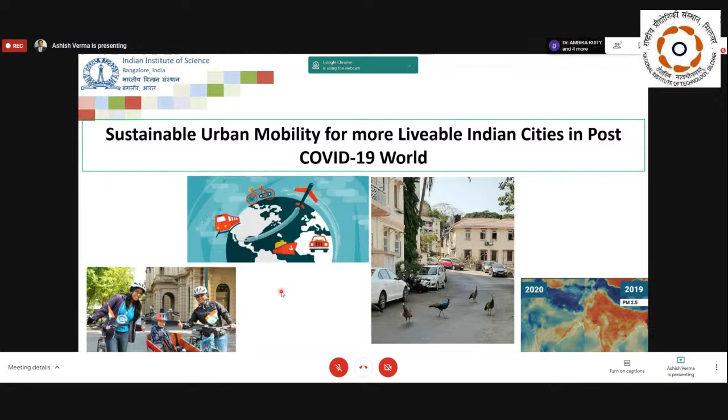But when we look at what a post-COVID world would be in terms of the transport system, it's important to also take a recap of what the pre-COVID-19 world was and what situation we were facing, because most of the time our memory is short and we tend to forget what we were experiencing. One can throw statistics, but it's very clear that we have seen steady growth in traffic congestion, growth in accidents and fatalities due to road accidents. We have also been seeing growing environmental problems, whether in terms of degrading air quality, increased noise pollution, or climate change impact.

With more and more vehicle kilometers traveled by motorized modes and road infrastructure being pumped in, we have also seen growing fuel consumption, leading to higher exhaust emissions, causing negative health impacts. The sum effect of this we have seen in terms of degrading livability of cities. These are all glimpses that have been quite common in the pre-COVID-19 world.

We have to keep this picture in mind, what we were experiencing in the pre-COVID world, when we go towards the post-COVID world. As I said, the lockdown has shown us how nature was thriving and reclaiming its space, and we have seen these visuals and news about it.

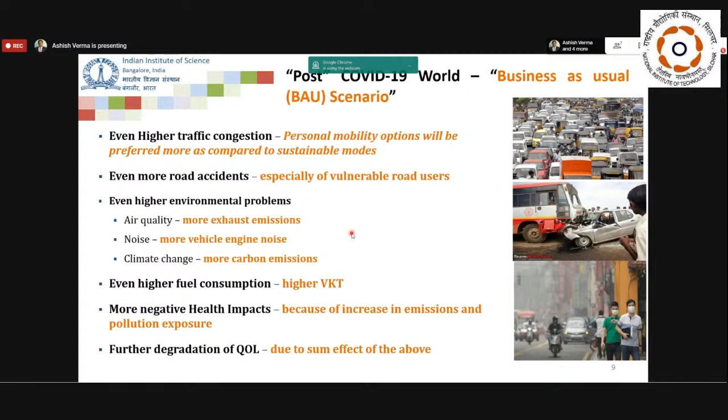This would anyway lead to further degradation of quality of life if we just go into the post-COVID-19 world with a business as usual mentality, due to the sum effect of all these things.

Now, we have understood over time that the transportation discipline has shifted from a supply-centric, traditional engineering-focused set of interventions to more demand-oriented, demand management-based interventions.

We have clearly understood that the traditional approach of transportation planning, which was always focused on V by C ratio, is no longer resulting in a sustainable transport system.

So transportation planning should no more be just about removing congestion points, taking this bottom-up approach and reducing V by C ratio, but should also be about reducing the total vehicle kilometers traveled by all motorized modes and thereby reduce the dependence on fossil fuel.

So it basically calls for a fine combination of both bottom-up and top-down approaches as the best way to move forward in terms of transportation planning, which would then lead to a sustainable transport system.

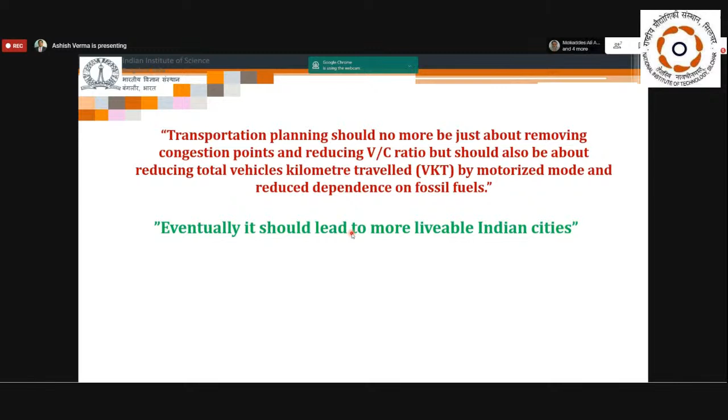Eventually, these interventions should lead to more livable Indian cities. Any intervention that degrades the livability of cities - there's no point in doing such interventions. So one has to be very clear and understand the causality between transport interventions and the impact on livability and quality of life, so that our interventions don't lead to degradation of these important aspects.

Now, achieving this was comparatively easier in a pre-COVID-19 world, but would be more difficult and challenging in the post-COVID-19 world, and of course it would be impossible under the business as usual scenario that we talked about.

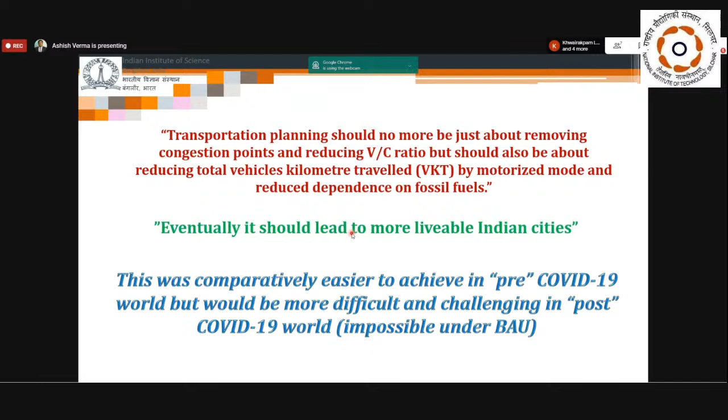These bundles should be a good combination of planning, regulatory, and economic instruments. So we're talking about not just planning interventions like increasing network coverage of public transport, or walking and cycling infrastructure, or mixed land use measures, but also defining car restricted roads, congestion pricing, park and ride, carpooling and high occupancy lanes, and electrification of buses and cars. A fine combination of these interventions is the best way to achieve the best possible scenario of urban mobility.

Now, to sum up what we understand from the sustainable urban mobility scenario, I would try to highlight the core principles that we should think about and follow. The rest of my presentation would try to give a flavor of how these core principles can be the focus of transport planning and can be achieved. I'm laying down these 9 core principles. First is reduce the need to travel.

I think this is very well understood during this pandemic time. The fact that this whole webinar is being arranged online clearly shows the amount of travel all of us could reduce—experts traveling, attendees traveling and meeting at one place, and so on. Likewise, in normal urban commuting situations, a lot of trips can be reduced by reducing the need to travel itself.

We've seen how work from home has proved effective—working from home on some days, staggered and flexible work hours, studying from home, online shopping and home delivery and things like that. These are some measures that we've learned can be effective in creating a more sustainable situation. Second is reducing the distances for travel.

In an urban context, it's about mixed land use policy and planning. The whole vision of vocal for local that our Honorable Prime Minister gave—if we think of it in terms of these transport interventions, it's about why there is a need for people to travel the length and breadth of a city for daily commuting and daily needs. Why can't it be self-sufficient within a given locality and neighborhood, at close distances, so that when the place where you live and the place where you work or study are closer, it's easier to adopt sustainable modes of travel.

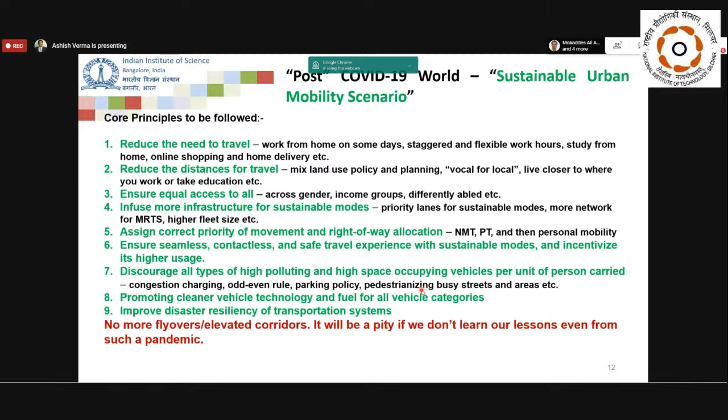Cycling, of course, fits very well under this COVID scenario. It takes care of both social distancing and sustainable mobility, and can be easily affordable to all sections of society. It's not a costly mode that a large section of society cannot afford.

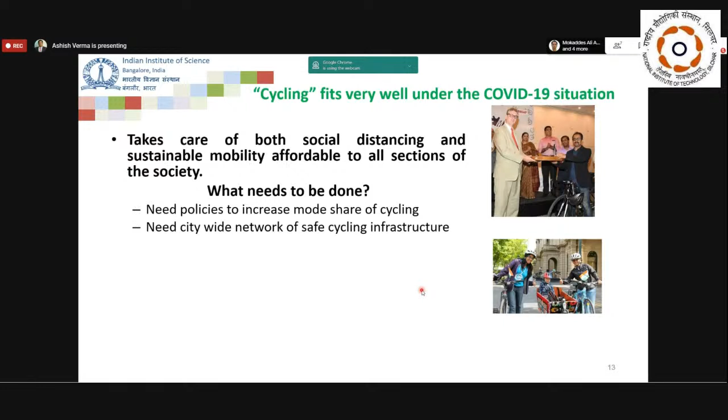But what needs to be done? We need policies to increase the mode share of cycling. We need a citywide network of safe cycling infrastructure. Rejuvenate the bicycle sharing systems—most of the bicycle sharing systems which popped up in the last few years are now dying because of the lack of policies, lack of infrastructure, and so on. So we need to rejuvenate them so that there is good supply of cycling as a mode.

Need innovations to make cycling a mode for all purposes, age groups and gender, and longer distances, making it weather resistant and safe. I think there's a lot in this bullet point that one can do. For example, today, if you think about cycling as a mode for all purposes, it's just not possible. If you want to go for shopping, can you carry shopping bags on cycle? No, the kind of cycles that we have today, we can't.

But there's a lot of innovations being done in Scandinavian countries and some European countries where cycling carries the major mode share, like Amsterdam, Copenhagen, and other cities, where they've done a lot of innovations in terms of cycling design and other aspects to make it an all-purpose vehicle, for all age groups, gender, and so on and so forth.

Better integration with public transport can help extend the distance range for which people can use cycles, and integration with other micro mobility options can also be a good way of overall promoting these measures. Of course, to execute all these things and focus on those core principles, we need good integration across different government agencies and levels of governance.

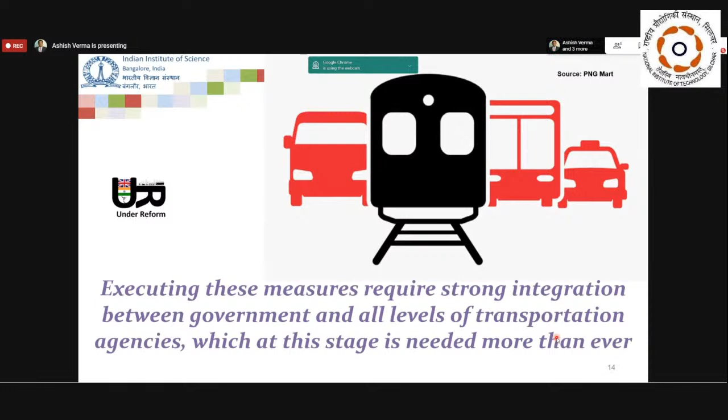Let me quickly come back to some of the results of Climatrans, where we focused on climate change mitigation policies from the transport sector for Indian cities. These were the core objectives of this project. I'll not go into details of all these aspects, but focus only on one, which is mitigation. We looked at the horizon years 2030 and 2050 to develop mitigation strategies for urban transport. There were three case studies: Delhi, Mumbai, and Bangalore. I'll only focus and present the Bangalore case study, since that was something we handled ourselves.

Second was to identify the vulnerability of transport infrastructure to climate change impact, and then based on that, develop adaptation strategies for horizon years 2030 and 2050 considering this vulnerability. We focused on urban flooding as one example of climate change impact—how transportation systems in urban areas can be made more resilient to urban flooding through different bundles of interventions and measures, and how that can be evaluated. In the interest of time, I'll not touch upon the adaptation part in this presentation. Hopefully next time I'll have the opportunity to separately present this work on adaptation.

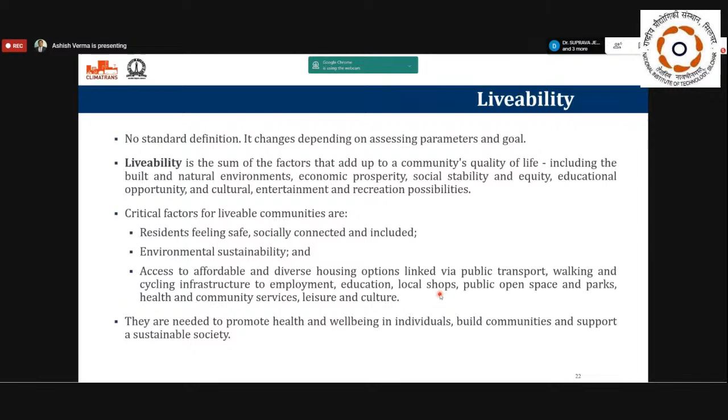Likewise, in environment, in terms of protecting environment, hazardous material, traffic fatalities, energy consumption, and so on. So there are a number of indicators one can think about for quality of life. Some can be quantitative, some qualitative and not so easy to measure. But we really need more research to understand how one can evaluate transportation systems and the transportation sector in terms of quality of life and livability.

We have done some research, but of course a lot more has to happen for Indian cities. In this Climatrans study, we mainly focused on the quantitative evaluation of livability, and we focused on all these indicators.

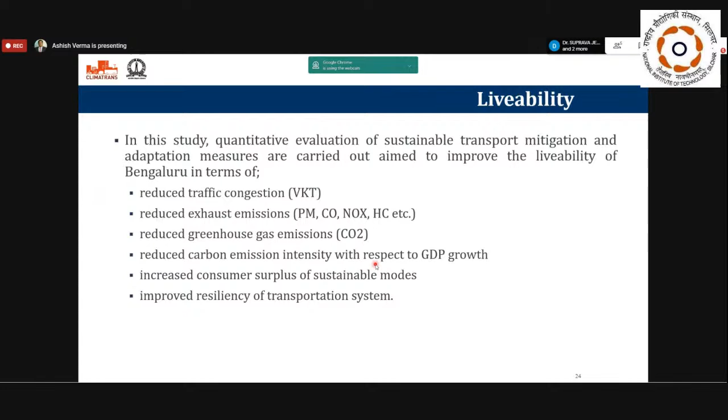So families who aspire to own and use a car suddenly find it difficult to enjoy that. And with that, we start this vicious circle of congestion where people put public pressure on their public representatives, policymakers, bureaucrats to increase more road capacity, so that everybody can enjoy their aspiration of car ownership and usage. And the result is we keep seeing more road widenings, flyovers, underpasses, and so on, which makes movement by personal vehicles easy, especially cars being a devil.

And this then further leads to more urban sprawl, cities growing horizontally, which then does nothing but increase the number of trips as well as the average length of trips, and brings us back to more congestion and delay. So our cities had been trapped in this vicious circle of congestion. And clearly, we understand there are various ways to cut this vicious circle of congestion.

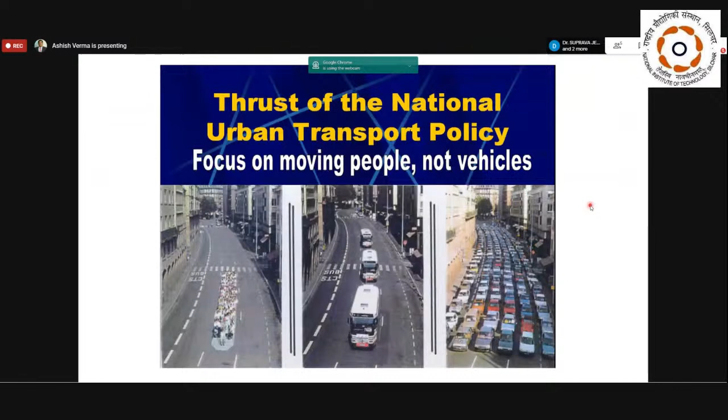So these are some of the ways in which we can cut across this vicious circle of congestion, which is what we have tried to evaluate in this project of Climatrans. And clearly, from our national urban transport policy, the focus is on moving people and not vehicles, and that's how we have to think about sustainable transport interventions.

Now, we also need to keep in mind the existing state of the transport system in our country and how it compares to some of the rich economies, for example US, Australia, Japan, Germany, etc., and when you club India along with the BRIC countries.

Now, of course, India is an aspiring economy, and we would like to grow economically. So it's not that we would like to restrict our growth on the x-axis. We would like to grow economically, we would like to increase our GDP. But while doing so, can our curve for car ownership be different? Can we saturate at a much lower level than the developed economies?

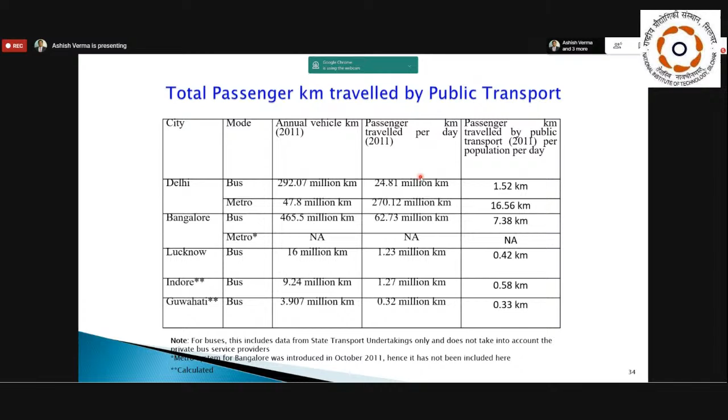Clearly one can see in this table that when comparing vehicle kilometers and passenger kilometers traveled - where vehicle kilometers mainly represents supply and passenger kilometer travel mainly represents demand, both in terms of number of trips and length of trip - for example, in case of Delhi, while bus has much higher supply as compared to metro, in terms of usage it is much higher for metro compared to buses. This clearly brings out the point that when you supply a public transport system which runs on an exclusive right of way, people tend to use it more and for longer distances.

Our per capita emissions also presently are quite less when you compare with many other countries. This again shows that we still have an advantage and an opportunity to contain them and not allow them to grow to a larger extent or larger level.

So from these few statistics, the main takeaway is that there is a clear opportunity for developing economies to make a choice and leapfrog to a sustainable transport future, mainly because our road infrastructure is still at a lower level while we are growing it at a fast rate. Our public transport and NMT infrastructure is also at a nascent level, so we clearly have a good choice available to us when building more infrastructure - which infrastructure we build more. Likewise, trip lengths in many Indian cities are still lesser and conducive for using sustainable modes. So the right set of policy planning and infrastructure interventions can help us achieve a sustainable mobility future quite easily.

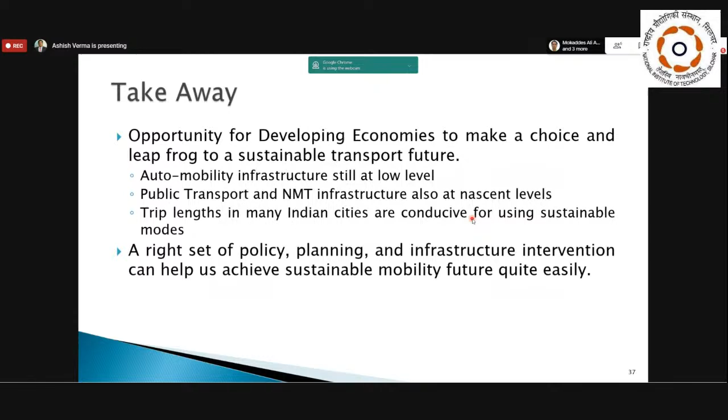When we think about transport interventions and reviewing them, one should always ask questions like: what is the amount of person capacity added per unit of investment made, mainly because our focus is on moving people, not vehicles? What is the amount of person capacity being added per unit of extra space width that you're creating? You may widen a road, but if you allow it only for personal mobility modes, you are underutilizing that extra space rather than keeping it aside for a bus lane, cycle lane, or footpath. And by what amount will fossil fuel consumption change because of the proposed interventions, and how will air and noise pollution change?

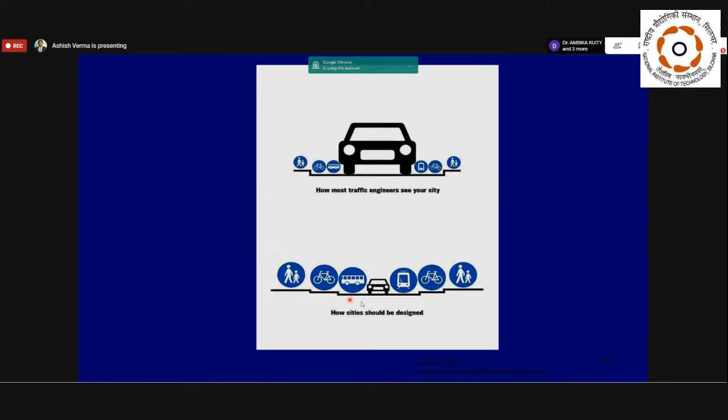If somebody does a thorough investigation to answer these questions for any transport improvements or proposals being made anytime in a city by city authorities, we would always ensure that our interventions are sustainable in nature. So while today traffic engineers see the vision of transport planning like this, where car or personal mobility options take a central stage, we should actually look at it differently, in terms of how we can create a more sustainable transport system.

Coming back to the flowchart of mitigation and adaptation under this CLIMATRANS project, what we do is first set up the base year emissions and also the future year emissions and targets, based on inputs of socioeconomic trends, transportation trends, and so on.

In terms of scenario analysis, on one side we focused on mitigation, where we estimate the mode-wise emissions, then design mitigation policies and evaluate them using a methodology based on macro simulation models and travel demand models. On the other side, we looked at adaptation, taking flood maps for a given city as input and carrying out vulnerability analysis of the road network in terms of flooded links, how it impacts the transport system, then designing and evaluating adaptation policies. That was the overall methodology.

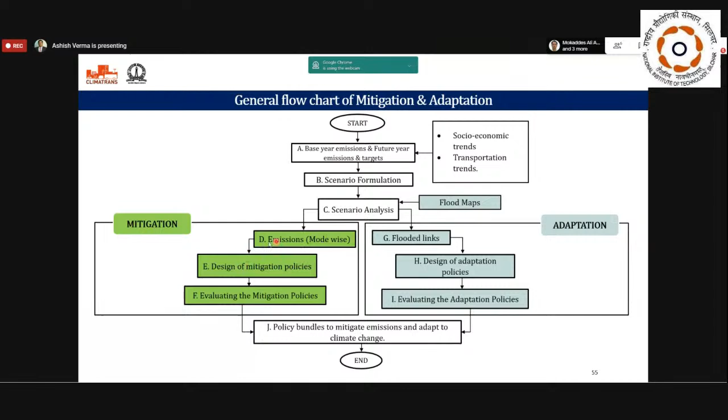As I said, I'll focus only on the mitigation aspect. This is the detailed methodology for developing the mitigation strategies.

With setting up the baseline trends and target levels, in terms of scenario formulation we have on one side the BAU scenario, and on the other side the sustainable transport scenarios, which we create through a Delphi approach, generating different possible bundles of sustainable transport measures. We evaluate and compare these with BAU using a travel demand modeling framework, which helps us estimate travel demand in different scenarios, mode-wise emissions, emission intensity, and consumer surplus. Together these help us appraise different strategies compared to BAU and develop a good mitigation plan to improve the livability of the city.

When we forecast the BAU scenario for 2030 and 2050, this is how the mode share looks in the base year as well as in 2030 and 2050. In the BAU scenario, you would see the car mode share, which is 2.3 in the base year, changing over time.

Just to keep in mind, the study area of focus was the whole Bangalore metropolitan region, which consists of three districts: Bangalore urban, Bangalore rural, and Ramnagar. The total area is more than 8,000 square kilometers.

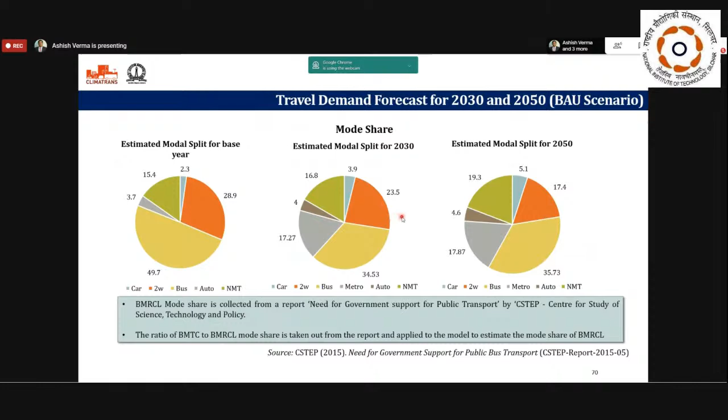When we translate this change in mode share in terms of VKT, vehicle kilometers traveled, one would clearly see from the loaded network how the links get darker in 2030 and 2050 for public transport flows and private personal mode flows. Looking at total vehicle kilometers traveled by all motorized modes, compared to the base year, by 2030 there's an increase of 55% in VKT, and by 2050, an increase of 132% compared to BAU. That's the expected increase in total vehicle kilometers traveled by motorized modes under the BAU scenario.

If you translate this into how emissions would change, focusing on these pollutants compared to the base year, CO2 emissions would increase by more than 2,000%, PM2.5 by more than 100%, NOx by 300%, and so on. This is the expected change in pollutant levels in the BAU scenario in 2030 and 2050.

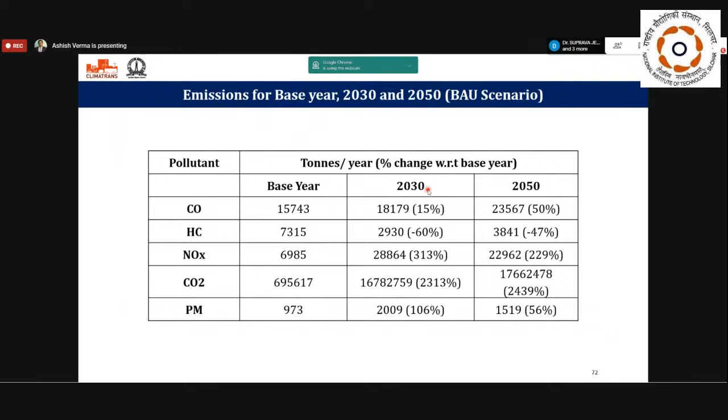In terms of what we want to achieve for better livability, the BAU scenario clearly shows that neither traffic congestion would reduce, since VKT is increasing, nor emissions would reduce, since we only see a huge increase in emissions. So the BAU scenario is certainly not sustainable. Something has to be done to make it sustainable, and that's where alternate scenarios come in, which we call sustainable transport scenarios. What we have done further is create these sustainable transport scenarios and evaluate them.

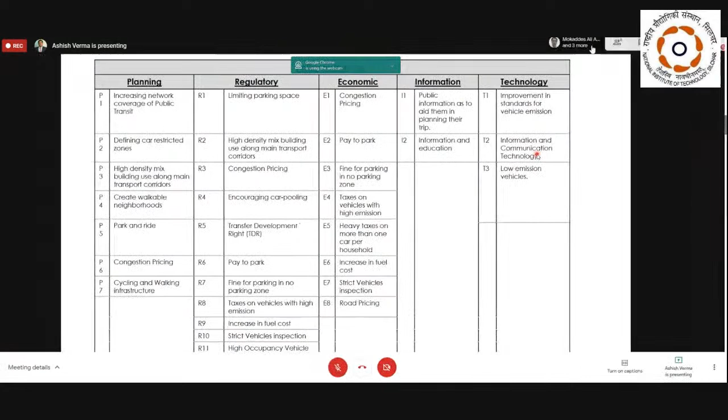So we started first with an exhaustive list of these different types or kinds of interventions one can think about. Then the whole idea was, can we create a good mix of some interventions from each of these instruments, creating these bundles, and see whether these bundles make sense and can be evaluated as sustainable transport scenarios.

Now, of course, while creating these bundles, the focus is on whether we can achieve that right push and pull concept. We generally talk about this in transportation planning, where there are certain modes we want to discourage people from using, and certain modes we want to encourage. So we want to ensure these bundles of sustainable transport scenarios help us achieve that right push and pull effect or not.

The second focus while creating these bundles was to ensure that a city like Bangalore, which was our case study, comes out of this vicious circle of congestion that we talked about a few slides back. So achieving this right push and pull concept, and helping the city come out of the vicious circle of congestion.

We went through a Delphi approach, with multiple rounds of meetings and feedback from stakeholders in the city. Stakeholders from all agencies like the public transport bus company BMTC in Bangalore, the Development Authority, Corporation, Pollution Control Board, and so on, taking officials and representatives, even from citizen groups.

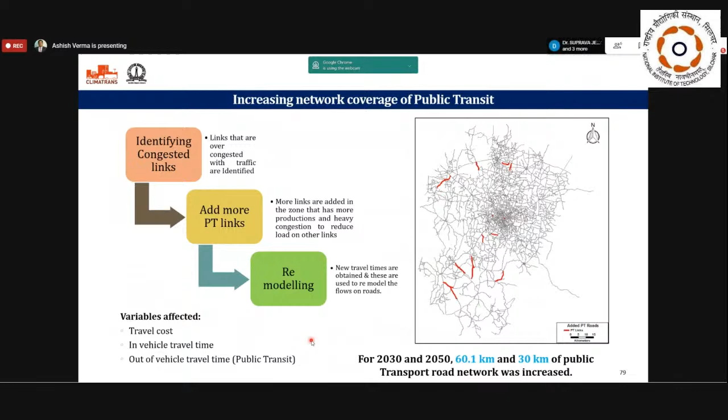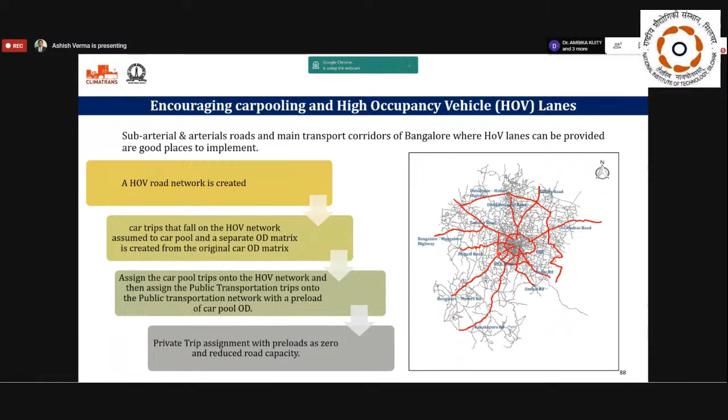And then we move further to analyze these bundles, 4 bundles of sustainable transport measures, with the implementation plan of each of these measures. Now, when you look at the impact on mode share, this is where we are looking at this push and pull effect, whether we are getting the right push and pull effect or not.

So here we are looking at the evaluation of bundle 1, where we had these 3 interventions included, and we have the mode share of 2030 and mode share of 2050. You'll see there are 2 bars for each mode, one for BAU and other for the bundle 1 scenario. You would see that we are able to increase the mode share of bus and metro to some extent, and also walking and cycling. Car mode share goes down a bit, and also 2-wheeler and 3-wheeled auto rickshaws. A similar trend is observed in 2050 also. So clearly it helps us see that we are able to achieve the right push and pull effect due to the introduction of bundle 1.

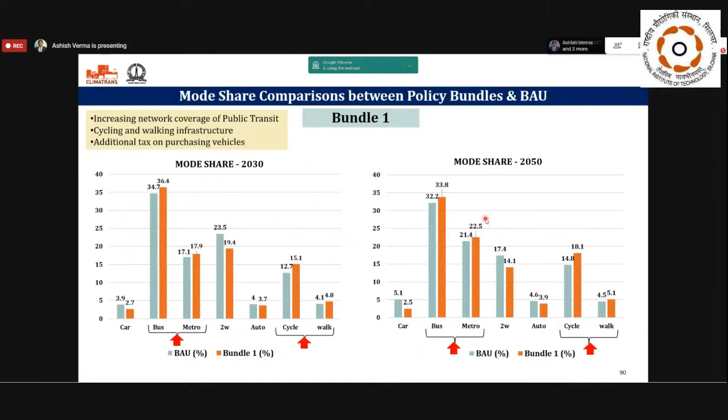The question is, which bundle gives us the maximum push and pull effect in the desired direction that we are intending to achieve. We had similar results in bundle 2, but what we got was the maximum impact in bundle 3. Now bundle 4 only has an additional intervention of all buses and cars running on electricity, and we neglected its impact on the change in mode share. So what we are seeing here is also applicable to bundle 4, with the assumption that there's no change in the mode share due to introduction of electric buses and cars.

Now, when we see this in terms of how the VKT is changing, again you have two graphs here, 2030 and 2050. This bar is for BAU, and then we have 3 bars for bundle 1, 2, and 3. So the maximum savings in VKT are obtained for the bundle 3 scenario, about 4.7 to 3.2% reduction.

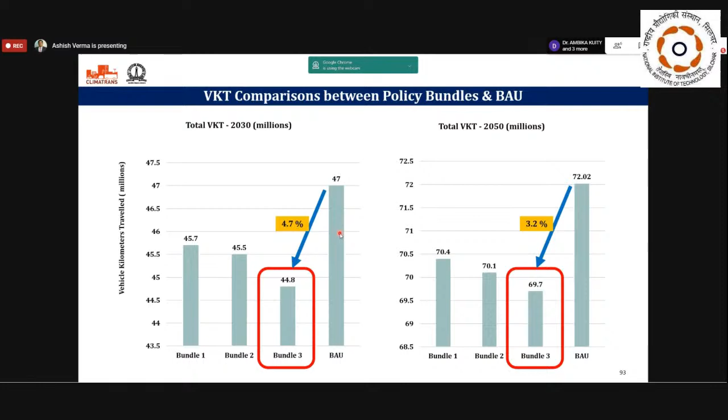Now let's see how this translates into the change in emissions. To estimate the emissions, as I mentioned earlier, we focused on 5 main pollutants: carbon monoxide, NOx, CO2, hydrocarbon, and PM. And in PM, we focused on PM 2.5.

Now, it would be a misleading argument for promoting electric vehicles if we don't take into account the source of electricity production, whether it is coming through renewable or non-renewable sources. Presently, in India, most of the grid electricity is coming from coal-based electricity, which is a non-renewable source with very heavy emissions. So while the emissions are not happening at the consumption point, they are certainly happening somewhere else at the production point, and are still contributed to the transport system. One has to also see how the share of renewable and non-renewable will change in the future, and how that would impact the actual emissions, taking into account the source of electricity production.

In India, the typical non-renewable sources are coal, heavy fuel oil, natural gas, and nuclear, and renewable sources are typically hydropower, bioenergy, solar, waste, and wind. It's important to understand that even among renewable sources, not all are clean. For example, bioenergy still has higher levels of PM and other pollutants, while CO2 is zero. Whereas sources like solar, wind, or hydropower are completely clean. So even among renewable sources, how much you're able to push towards a completely clean source of energy is important to ensure electric vehicles are zero-polluting vehicles in a true sense.

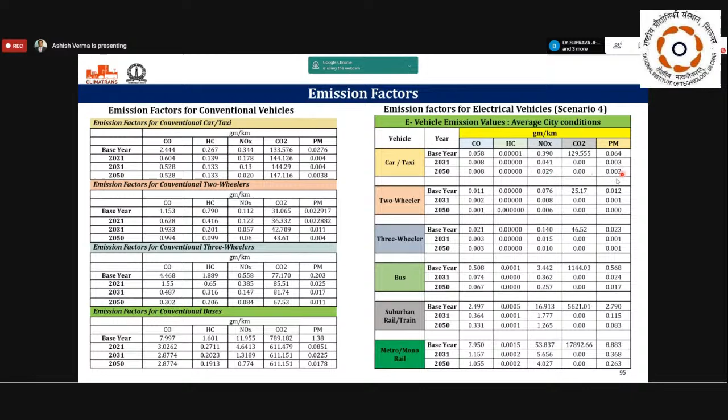You can see here, this is scenario 4 of electric vehicles, where 100% of electricity is coming from renewable sources. You'll see, for example, future CO2 emissions become zero, but you still have emissions of PM and NOx, and to some extent CO also. That clearly shows that even in renewable sources, since you don't have a completely clean source of energy, you still have emissions for some of the pollutants. So likewise, we obtained the emission factors for electric vehicles for all 4 scenarios.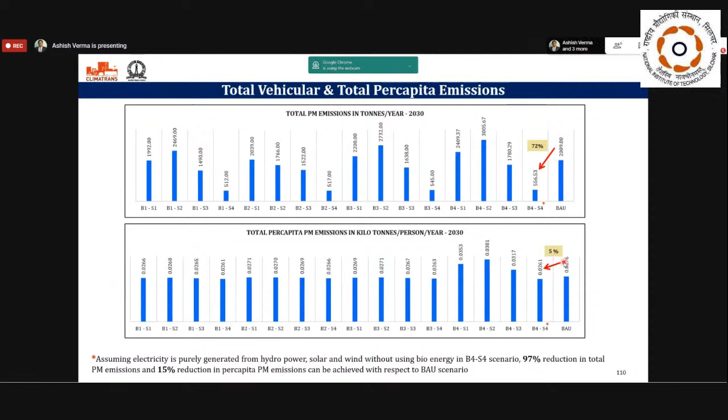If you actually clean the source of electricity in this S4, this potential reaches 97% in total and 15% in per capita, completely cleaning the source of renewable energy as well. This is for 2030 for PM2.5.

In a nutshell, if you summarize the maximum mitigation potential under this B4 S4 scenario compared to BAU, this is the percentage of mitigation potential for each pollutant that one can achieve. These are huge savings clearly. If you see the reduction in VKT plus the reduction achieved on each of these pollutants, you can clearly make the city much more livable in terms of these quantitative indicators.

We further compared the impact of these bundles in terms of emission intensity with respect to GDP. As I mentioned during the introduction, India had committed to reducing its emission intensity with respect to GDP by 33 to 35% by 2030 from 2005 levels.

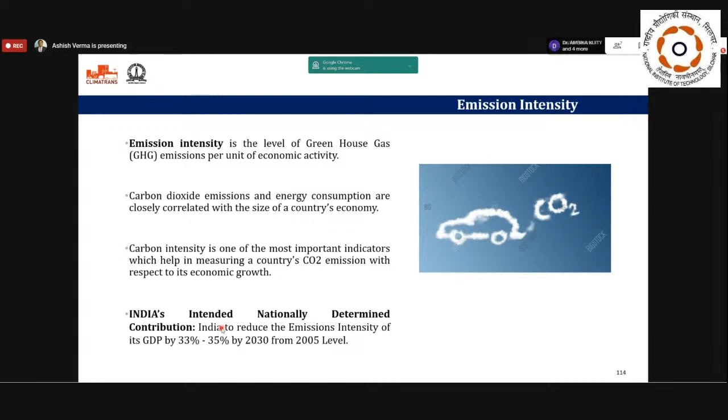So what we did was estimate the emission intensity reduction achieved for each of these bundle scenarios, and see whether that same 33 to 35% reduction can be achieved at least from the urban transport sector or not.

What you can clearly see here is, in this lower figure, with the B4 S4 scenario, the mitigation potential with respect to the base level of 2005 is 91%. So clearly it is more than 3 times what India actually committed in the climate summit. We can outperform our commitments to the international community if we introduce a combination of bundle 4 and S4.

We also found that if we clean up the electricity source completely, even with the BAU scenario, one can achieve a 39% reduction in CO2 emissions by 2030, just by cleaning up the source of electricity.

In the BAU scenario, the emission intensity is still quite high, mainly because more trips are happening on metro rail systems, which run on electricity, or a certain share of buses running on electricity, leading to higher emissions when accounting for electricity production. So if we clean that source, even with BAU, we achieve a 39% reduction.

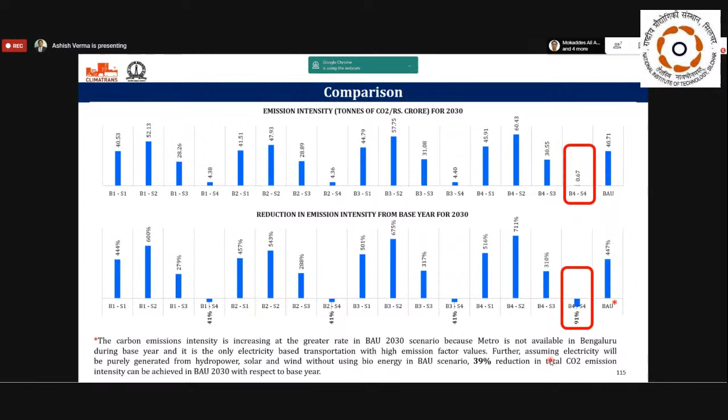I'll come to this other part of the work as part of this Indo-UK project, where we were assessing the health impacts of transportation.

Our methodology was to look at 3 different pathways of health impact. One was the impact of using active modes of transport, walking and cycling, and how physically active modes have an impact on health. The second was exposure to air pollution and what is the health impact of that - here we mainly focused on exposure to PM2.5 and how that results in mortalities. The third pathway was the injury model, where we focused on the impact on road traffic fatalities from the transport system. So we took these 3 pathways to understand the health impact in totality.

To some extent, some of these are still work in progress. I'll only show some of the concepts and a few results from whatever we have so far.

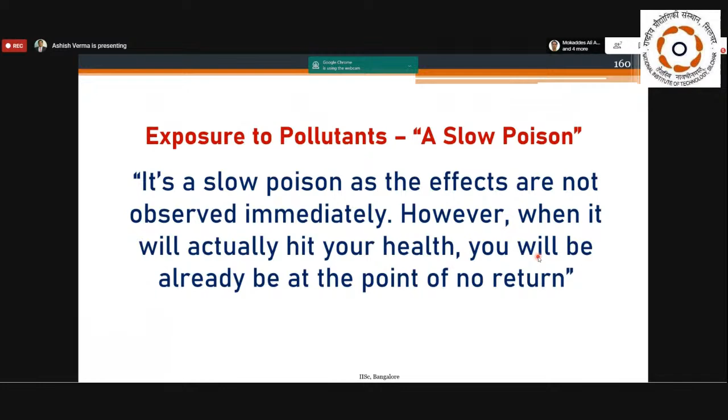When we think about exposure to pollution, I always say it's like a slow poison, because the effects are not observed immediately. This whole exposure to pollutants - we keep inhaling them - it's not that we'll immediately have its impact visible to us. However, we keep getting exposed to these pollutants over a sustained period of time, and it reaches a point where it actually hits our health, and that would be a point where we'll already be at the point of no return. It's like a slow poison - it keeps poisoning you at a slow rate without us realizing, and we only realize it at a point when we are at the point of no return. So it's important to understand this causality and take care of it to whatever extent possible.

One important aspect to understand exposure level is, from the CLIMATRANS study, we have already created a methodology to estimate the total exhaust emissions coming from all motorized vehicles. But we have to connect this to the ambient levels or exposure levels of these pollutants - what is the exposure level to pedestrians, or to a commuter sitting in a public transport vehicle or inside a car, and so on. For this we need two things: a good modeling exercise requires source apportionment, so that the ambient level of these pollutants is apportioned to different sources, to understand to what extent transportation and other sources are contributing to the ambient level. So while we may have an estimate of exhaust emissions, it is still not sufficient to understand the exposure level, because we have not yet connected it to the ambient levels.

For example, when we have sensors in different parts of the city, they basically measure the ambient levels. So we need to do a good source apportionment study in any given city, connecting it to the sectoral emissions and how much contribution each sector is giving. Once we do that, and once we have ambient levels at certain discrete points in the city through these sensors, we also need to do a good air dispersion model to estimate emission levels across a grid or continuum space over the study area, to understand the exposure level at any given point. So to reach the actual health impact, we have to connect these dots - a good source apportionment study and air dispersion model.

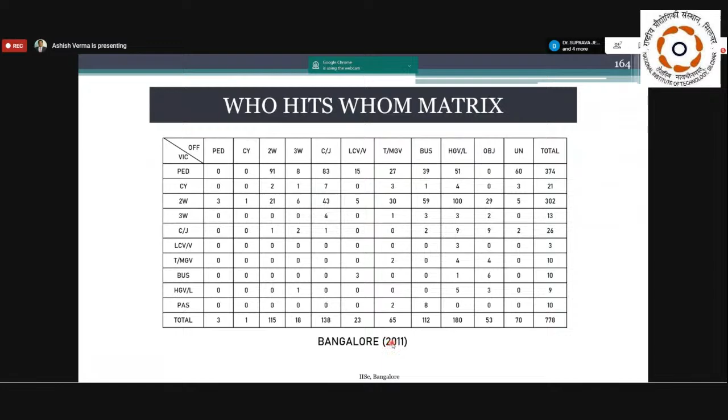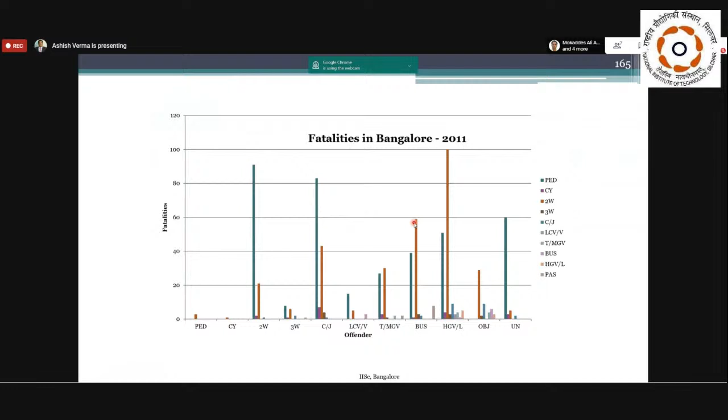Likewise, if we see the buses, it's causing more deaths for two-wheelerists, and these heavy vehicles and so on. Likewise, we actually created this 'who hit who' matrix for different years: 2011, 12, 13, and so on.

And then what we did was we tried developing this kind of risk-based model to estimate the fatalities of a certain victim type with respect to the threat vehicle, using a combination of these parameters, K and r, where K threat victim relates to the probability that a road user, which is the victim, is struck by the threat vehicle.

This is how we actually get the probability, basically as a proportion of the distance traveled by the victim vehicle and the threat vehicle. And likewise, we also estimate or use this factor R, which is the case fatality ratio of the victim of the crash, as a function of the vehicle attributes, victim attributes, crash conditions, and so on.

So this basically represents the case fatality ratio for different combinations of threat and victim users. And then we estimate the total fatalities based on the total distance traveled by the victim and threat vehicles and these parameters that we have identified.

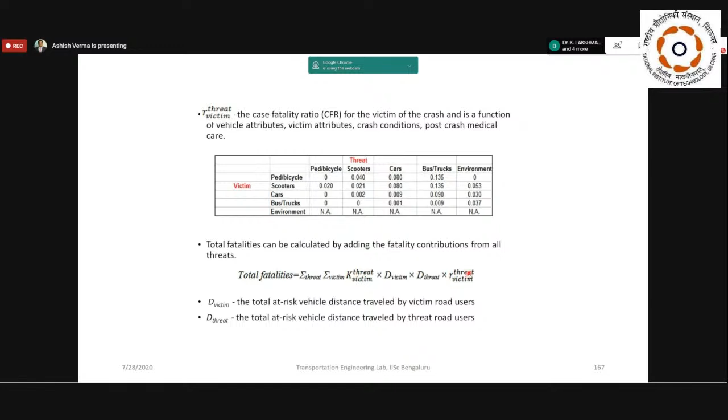So this clearly tells that pushing more people towards public transport, especially buses, is actually a win-win situation, both in terms of achieving a sustainable mobility system, but also in terms of reducing the number of deaths, the number of fatalities happening due to road accidents.

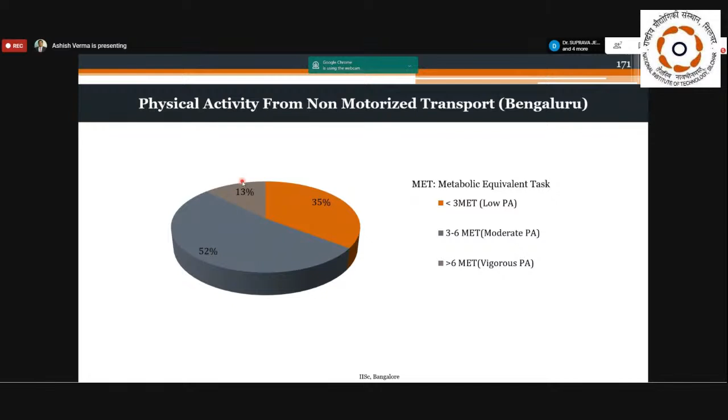This clearly shows that there is still a good need to improve the usage of physically active modes like walking and cycling, to make the population largely physically active and have positive benefits of health because of that.

The irony is that when, in today's situation, you have fewer people walking and cycling, they are actually at a higher risk due to more exposure to pollutants. You may take up cycling or walking with the intention of having more physical exercise and keeping healthy. But since the share of walking and cycling is less and there are more motorized vehicles emitting more emissions, NMT mode users are at a higher risk of more exposure. So the gains from walking and cycling get negated due to more exposure to pollutants. People in cars who pollute more are actually affected less compared to walkers and cyclists, who are using sustainable modes but end up getting exposed to pollutants more. That's the big irony.

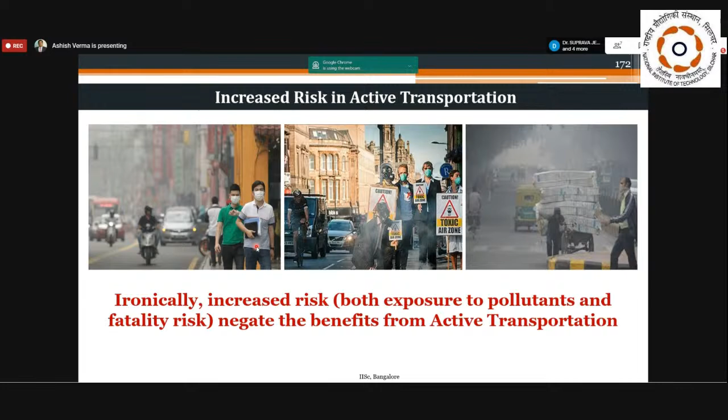To overcome this irony, the only way is to increase the mode share of sustainable modes and reduce the vehicle kilometers traveled by motorized modes, so that we reach a balance where walking and cycling really become a net positive in terms of health impact.

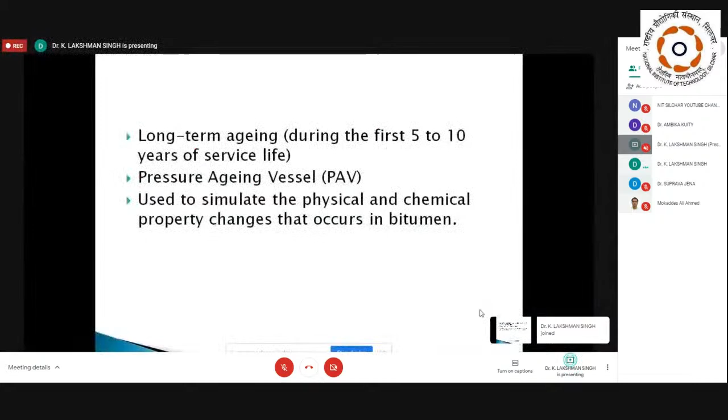Checking audio, sir. Hello, is it audible? Yes, sir. Okay.

Thank you very much, Dr. Ambika. I'm really thankful to NIT Silchar for giving me an opportunity to share my knowledge in this webinar series. Today I would like to present a topic on the study on rheological properties of modified and unmodified bituminous binder. Good afternoon to all, and thank you very much for giving me a chance to speak on this topic.

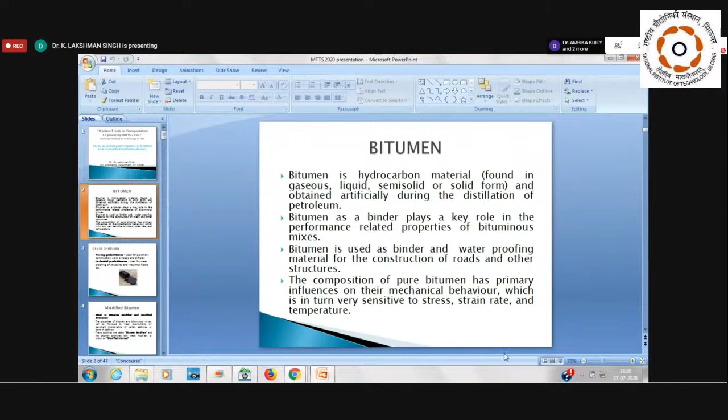So I would like to mention the outlines of the presentation. Here I will discuss only the importance of bitumen, modified bitumen, and rheological properties, and not discuss the bitumen mixes.

The main outline of the presentation is: bitumen, grade of bitumen, modified bitumen, classification of bitumen, modifier, classification of modified bitumen, performance grading system, and physical properties of modified bitumen, penetration index, aging of bituminous binder, Superpave test methods and equipment, rheology of the bituminous binder, and rheological properties of modified bituminous binder. Then the performance grade of different polymer modified bitumen, complex modulus, phase angle with temperature, effect of aging on modified bituminous binder, and lastly the temperature susceptibility of bituminous binder.

First of all, I would like to mention about bitumen. Bitumen is a very important part of the flexible pavement because it plays a very important role. That's why it's important to know what bitumen actually is. Bitumen is a hydrocarbon material, generally found in gaseous, liquid, semi-solid, and solid form, and it is obtained artificially during the distillation of petroleum.

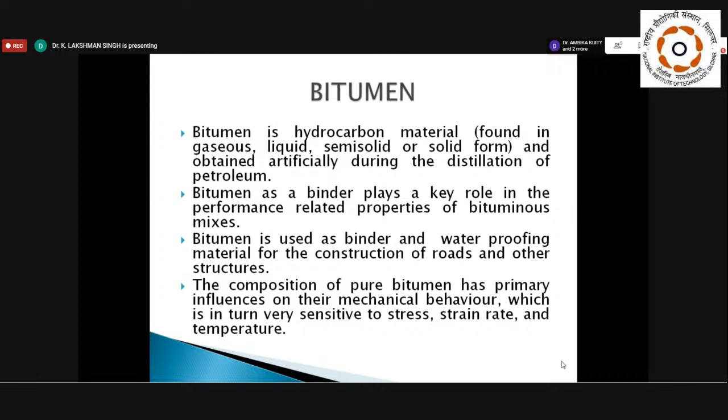So now comes the grade of bitumen. As per IS specification, there are two types of grade of bitumen. They are paving grade bitumen, used for pavement construction of roads and airfields, and industrial grade bitumen, which is generally used for waterproofing of structures and industrial floors, etc.

Now comes the modified bitumen. The question is why bitumen needs to be modified and how modified bitumen can be used in road construction. First, we have to know what is bitumen modifier and modified bitumen. The properties of bitumen and bituminous mixes can be improved to meet requirements by incorporating certain additives or blend of additives. These additives are called bitumen modifiers, and bitumen premixed with this modifier is known as modified bitumen.

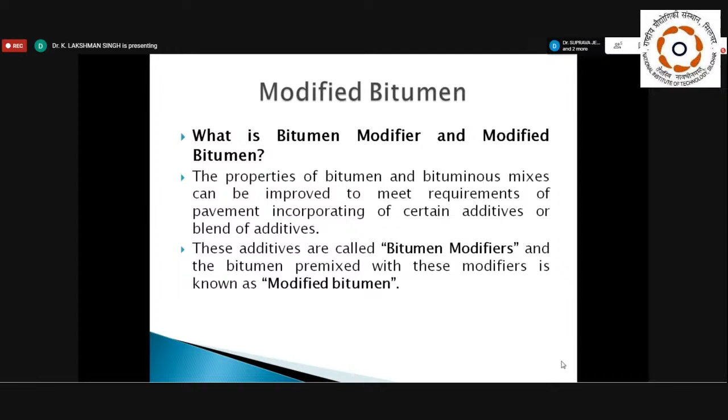Here is the classification of bitumen modifier as per IS specifications. It is divided into three parts: synthetic polymer, synthetic rubber, and other rubber. In synthetic polymer, two types are there: plastomeric thermoplastic and elastomeric thermoplastic. Synthetic rubber includes synthetic rubber latex, and other rubbers include natural rubber and crumb rubber. Polyethylene, ethylene vinyl acetate (EVA) are examples of plastomeric thermoplastic. And SBS, styrene butadiene styrene, very commonly used in modification of bitumen, is also an example of elastomeric thermoplastics.

Synthetic rubber latex includes styrene butadiene rubber latex and any other suitable synthetic rubber. Latex or rubber powder comes under natural rubber, and crumb rubber powder from discarded truck tires is also an example of crumb rubber.

As per IS 15462, modified bitumen can be classified as PMB P40, PMB P70, PMB P120, PMB E40, PMB E70, PMB E120, NRMB 40, NRMB 70, NRMB 120, CRMB 50, CRMB 55, CRMB 60. Here PMB P means polymer modified with plastomeric, and E means elastomeric.

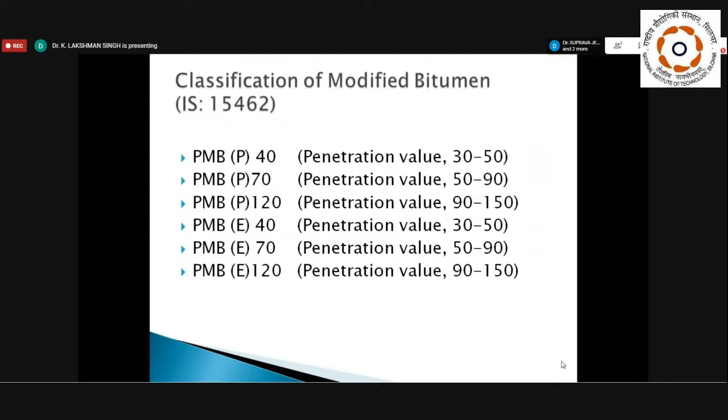These grades of polymer modified bitumen are based on the penetration value. PMB 40 indicates penetration value varies from 30 to 50. Similarly, for natural rubber modified bitumen, the indicated penetration value is also 30 to 50. But in case of CRMB 50, CRMB 55 and CRMB 60, this is based on the softening point value. CRMB 50 means the softening point of this modified binder will be minimum 50.

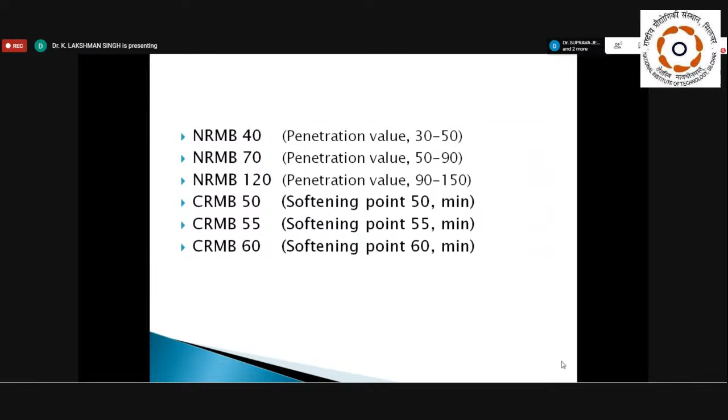Now comes the advantage of modified bitumen. Because of certain advantages, modified bitumen is commonly used in pavement construction. The advantages are lower susceptibility to daily and seasonal temperature variations, higher resistance to deformation at elevated pavement temperature, and better bonding between aggregate and binder. It also shows higher fatigue life of mixes, delay of cracking including reflective cracking, and overall improved performance in extreme climatic conditions and heavy traffic conditions.

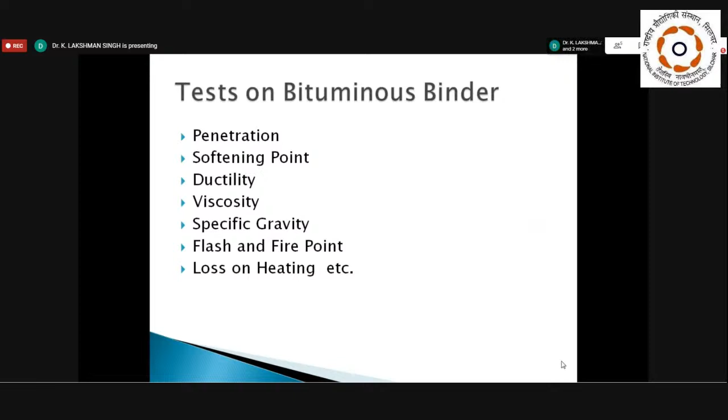In the country, various types of bitumen have been used in road construction, but without knowing the properties, it cannot be used in pavement construction. Therefore, the binder used in road construction has to be tested. There are some tests given like penetration, softening point, ductility, viscosity, specific gravity, flash and fire point, and loss on heating test, etc.

Now comes the grading system. In the country earlier, the grade of bitumen was based on penetration value, like 30, 40, 60, 70, 85, 100. But this type of grading system is only based on the penetration value, which is measured at 25 degrees Celsius. So the grading system based on this penetration value does not give a full picture or properly describe the properties of the bituminous binder.

So the BIS developed a new technique called viscosity grading, which is based on 60 degrees Celsius and 135 degrees Celsius. This is because the road pavement surface sometimes reaches up to 60 degrees Celsius, and the bituminous mixes are taken at 135 degrees Celsius. This type of grading system is more reliable than the bitumen grading system based on penetration value. Therefore, nowadays this type of grading system is commonly used.

So the viscosity grading is VG10, VG20, VG30, and VG40. VG10 is equivalent to 80/100 penetration value, VG20 is 60 to 80, VG30 is 50 to 60, and VG40 is 40 to 50.

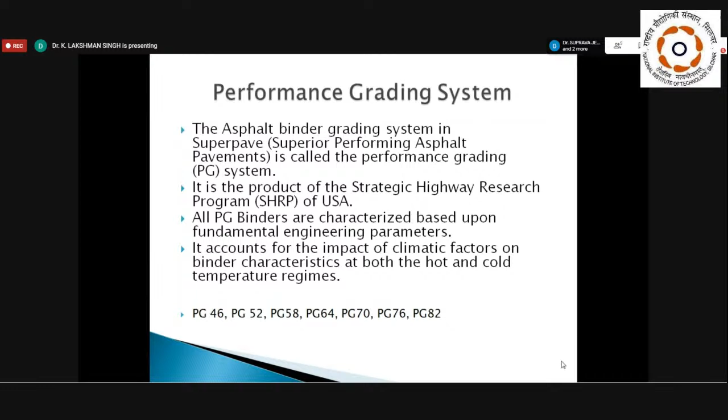All PG binders are characterized based on fundamental engineering parameters. It accounts for the impact of climatic factors on binder characteristics at both hot and cold temperature regimes. Examples of this grading system are PG46, PG52, PG58, PG64, PG70, PG76, PG82.

In order to characterize the binder, we have to see the properties of the modified binder using different additives.

Now come to the physical properties of bitumen modified with SBS and EVA. From this table, it can be seen how much the addition of additives or bitumen modifiers can change the properties of the bituminous binder. Bitumen only, without any additives, has a penetration value of 63, but with 3% SBS it comes to 50. In terms of softening point, it is found to be 49.5, but after addition of 3% SBS, it comes to 61. Similarly, in the case of EVA at 9%, the penetration value comes to 32, and the softening point comes to 78.2. This indicates that the properties have changed drastically by addition of the modifier.

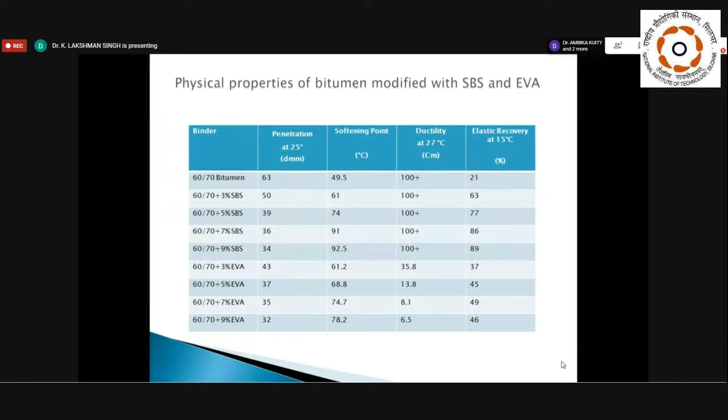Now comes the penetration index. The penetration index also measures the temperature susceptibility of the bituminous binder, and this temperature susceptibility can be measured from two parameters: the softening point and the penetration value.

With increasing percentage of modifier, the PI value also increases. SBS modified binder gives the highest PI value at the same percentage of additive compared to CR and EVA. As per specifications, PI greater than 2 is taken as blown bitumen, bitumen used in pavement construction will be between -2 and +2, and less than -2 is temperature susceptible bitumen, like soft bitumen which falls under this PI range.

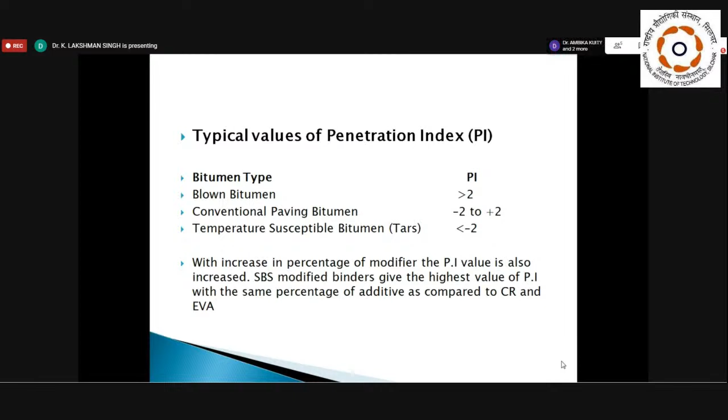Now come to the aging of bituminous binder. Why is aging so important to study the properties of the bituminous binder? As we know, the surface of the pavement is always exposed to different climatic conditions and always exposed to different loading systems.

Therefore, the binder used in the pavement surface should be able to withstand such loadings and climatic conditions. The aging of bituminous binder occurs during mixing, the laydown process, and during service. It is divided into two types: short-term aging and long-term aging.

First, let us discuss short-term aging. This short-term aging is considered for the construction of the pavement structure, that is, during a short period. Short-term aging is generally evaluated using the thin film oven test and the rolling thin film oven test.

In the case of long-term aging, it generally indicates aging during the first 5 to 10 years of service life, and it can be measured using pressure aging vessels. This PAV test is used to simulate the physical and chemical property changes that occur in bitumen.

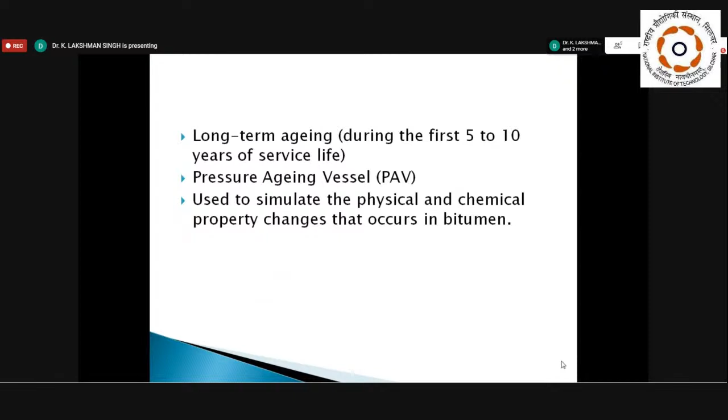In order to find out the different properties and characterization of the bituminous binder, we have to use high-tech techniques, and different types of methods and equipment should be used. Therefore, PG test methods and equipment are necessary to consider when finding the properties of the bituminous binder.

The direct tension test is used for determining the fracture properties of asphalt binder, following the procedure AASHTO TP2. It also measures binder properties at low service temperature and indicates resistance to thermal cracking.

The bending beam rheometer test is used for determining the flexural creep stiffness of asphalt binder, following the procedure AASHTO TP1. Its purpose is to measure binder properties at low service temperature, and each parameter can be used for resistance to thermal cracking.

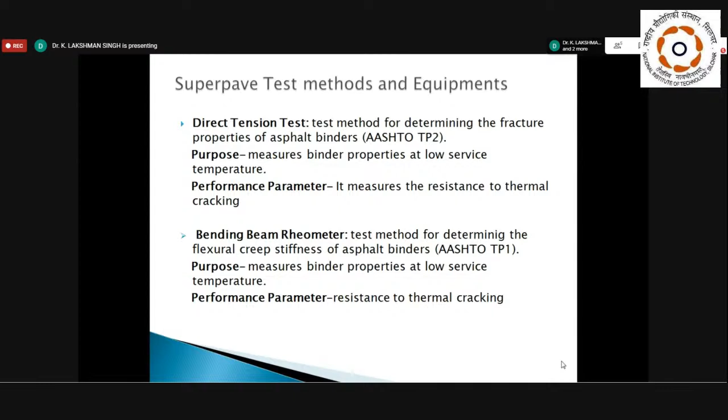Now comes the dynamic shear rheometer. It is a very important part for determining the real properties of bituminous binder, and this procedure is taken under AASHTO TP5. The main purpose of this DSR is to measure binder properties at high and intermediate temperature, and this parameter can measure the resistance of permanent deformation and fatigue cracking.

Now come to the pressure aging vessel. It is practiced for accelerated aging of asphalt binder using a pressurized aging vessel. The main purpose is it can simulate binder aging during service life, and this performance parameter measures resistance to aging during service life, that is 5 to 10 years.

Now come to the rheology of the binder. This is a very important part of the bituminous binder, so before knowing this we should know what is actually rheology of the binder. Rheology can be defined as the flow characteristics and the deformation of matter, also known as rheology of binder. Therefore, rheology is a very important field of study for asphalt technologies.

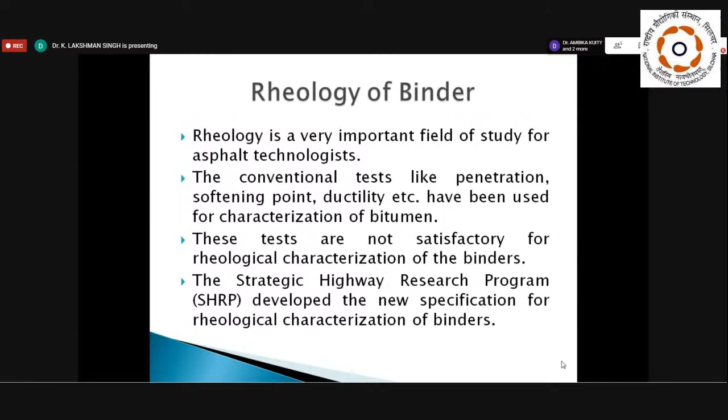Phase angle measures the viscoelastic character of the bitumen. A purely viscous liquid and an ideal elastic solid demonstrate a phase angle of 90 degrees and 0 degrees respectively.

So come to the rheological properties of bituminous binder. Why are rheological properties so important? Because conventional tests give only a partial picture to characterize the bituminous binder. Therefore, rheological characterization using dynamic shear rheometer gives the full properties in order to find out the properties of the bituminous binder. Therefore, dynamic shear rheometer is used for determination of the rheological properties of bitumen over a wide range of temperature.

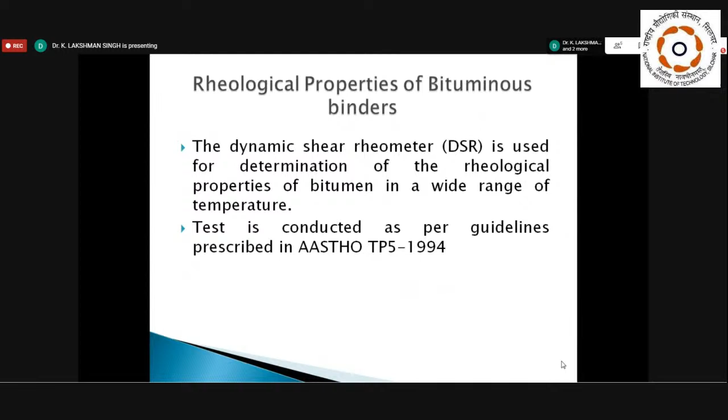This test is conducted as per guidelines prescribed in AASHTO TP5-1994. Here I am showing a picture of the dynamic shear rheometer and its components. The components of this rheometer are air dryer, control module, test station, environmental controller, and personal computer.

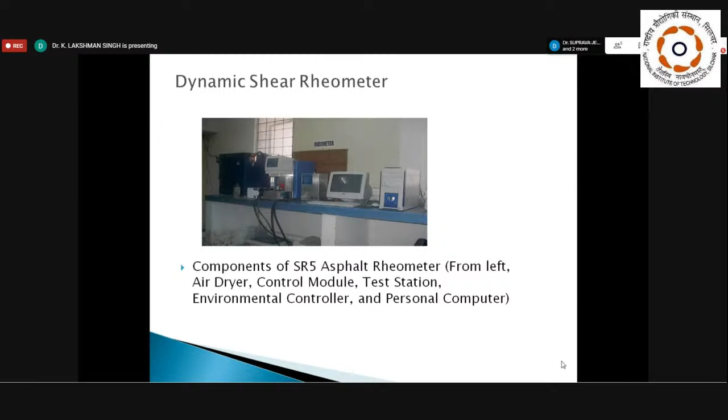Air dryer means the air which is coming from the air compressor is filtered and dried. The test station houses the stress head, fluid bath, and all support electronics. Environmental controller is used to control the temperature of the test station.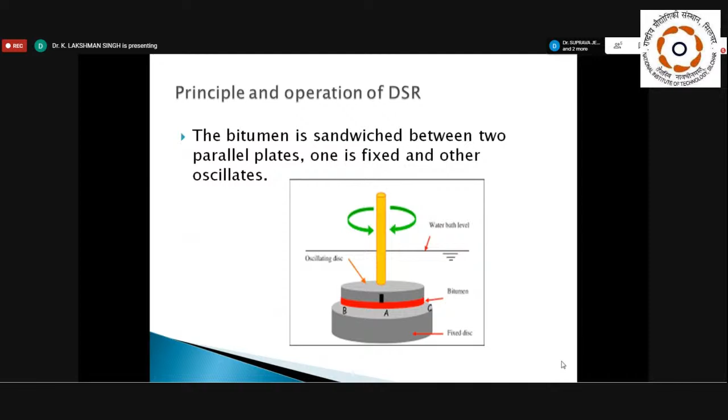Now come to the principle and operation of DSR. The bitumen is sandwiched between two parallel plates, one fixed and the other oscillating. As the plate oscillates, the center line point A of the oscillating plate moves to point B. From point B, the plate moves to point C and ultimately moves back to point A. The movement of the center line from point A back to point A is called one cycle, and this cycle is continuously repeated in the DSR operation.

The rheometer can describe the linear viscoelastic properties of the binder over a wide range of temperatures and loading times. During testing, a sinusoidal shear stress is applied to a sample of bitumen sandwiched between two parallel plates. The resulting sinusoidal shear strain is monitored as a function of temperature and frequency. Based on these stress and strain measurements, stiffness and viscosity can be obtained at different temperatures, frequencies, and strain levels of the bitumen samples.

In the dynamic shear rheometer, a 25 mm plate was used for measurements at different temperatures from 46 degrees to 82 degrees Celsius. All the binders were tested at a frequency of 10 radians per second to determine the performance grade of formulations. This frequency corresponds to a traffic speed of 80 km per hour.

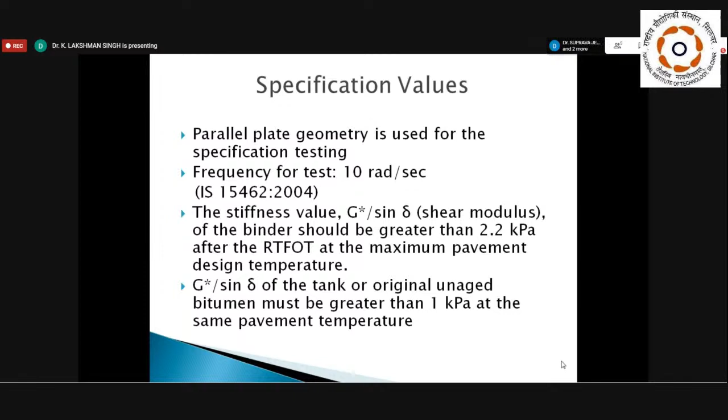In our country, as per IS specifications, different types of VG bitumen have been tested in the rheometer. VG 10 is tested at 52 degrees Celsius, VG 30 is tested at 58 degrees Celsius, and VG 40 is measured at 70 degrees Celsius.

So now come to the rheological properties of SBS modified bituminous binder. Here I want to show how much the rheological properties can be affected by addition of the SBS.

In the case of the original binder, 60/70 bitumen, it has a complex modulus of 3.78 at 58 degrees Celsius, and at 70 degrees Celsius it is found to be 0.80. I mention two temperatures, 58 and 70 degrees Celsius, because as per IS specifications, according to the grade of the bitumen, testing is done at 58 and 70 degrees Celsius. So here at 70 degrees Celsius for the original binder, it is found 0.80, and in the case of phase angle, it is over 93.2 degrees. Therefore, the original binder tested in the rheometer has a phase angle value exceeding 93, and therefore this binder has failed.

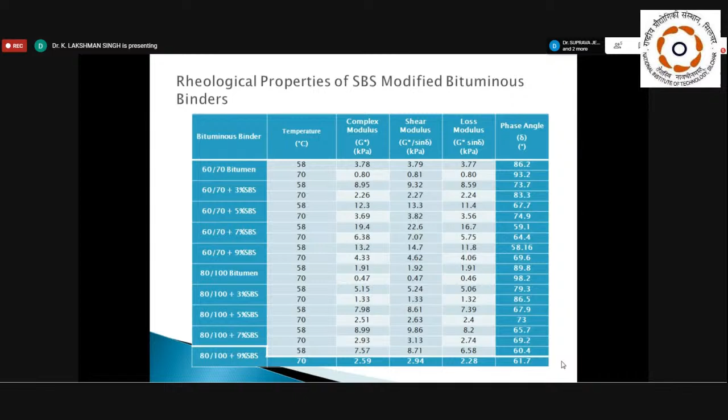Similarly, here I'm showing the rheological properties of crumb rubber modified bituminous binder, and we can see the changes by addition of crumb rubber. At 70 degrees Celsius, it is found 2.93 kPa, and in the case of phase angle, at 58 degrees Celsius it is found 67.5, and at 70 degrees Celsius it is found 68.9. So from these observations also, we can find out how much the properties of the bituminous binder can be affected by addition of crumb rubber.

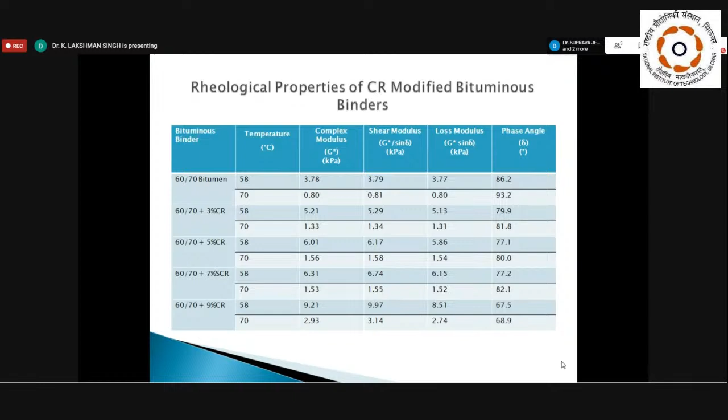As per superpave, performance grade of bitumen is also based on climate. The performance-based SHRP specifications have suggested different grades of bituminous binder on the basis of G star by sine delta. The temperature at which this parameter attains a value of 1 kPa before aging of the binder, and 2.2 kPa after aging, is termed as the performance grade (PG) of the binder.

This figure shows the relationship between shear modulus versus temperature. From this figure, it can be seen that the shear modulus also decreases with increase in temperature.

Now come to the shear modulus G star by sine delta with temperature, measured at 10 radians per second, for EVA modified binder before aging. From here also, most of the modified binder is above 1 kPa.

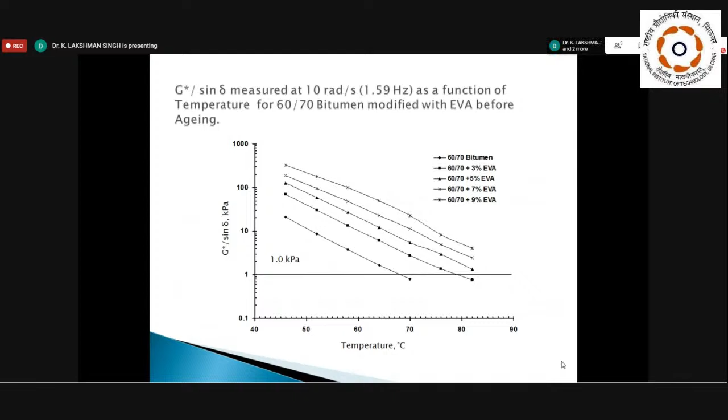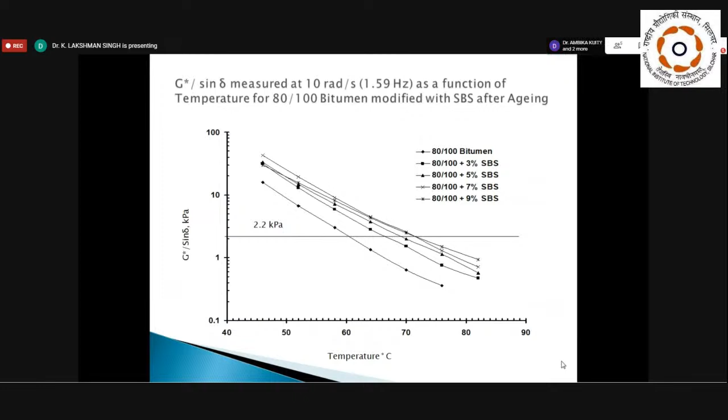From these two figures, we can find out the performance grading system. Here I'm showing some performance grades of different polymer modified bitumen.

Here we can see the temperature corresponding to G star sine delta equal to 1 kPa, and G star sine delta equal to 2.2 kPa. In the case of original binder, it has been shown as 60 and 64.5. So as per performance grade, as per SHRP specification, it comes under PG64.

In the case of EVA modification, let us see at 5% EVA, before aging it comes to 83.5, and for G star sine delta equal to 2.2, it comes to 82. Therefore, this performance grade becomes PG82. Similarly, we can find out all the different percentages of modifier added to the bitumen for EVA modified with 80/100 grade bitumen, and SBS also.

Here I'm showing the relationship between complex modulus and phase angle with temperature. From this figure, we can find out the viscoelastic behavior of the bituminous binder, because the phase angle is also used to measure the viscoelastic properties of the bituminous binder.

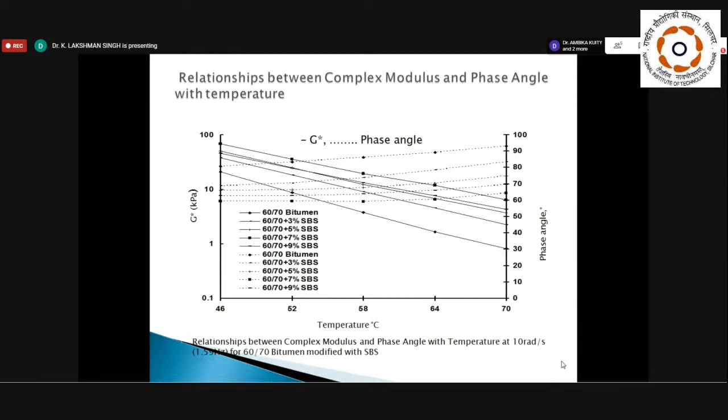Now come to the relationship between loss modulus and storage modulus with temperature. The binder should have a large value of storage modulus G' at high temperature for deformation resistance, because G star or G' measures the binder elasticity.

Increase in elasticity of the binder at low temperature facilitates fatigue cracking, as the absorbed energy is less easily dissipated. So low elasticity is suitable at low temperature to facilitate dissipation, but high elasticity is convenient at high temperature to avoid viscous flow of the binder.

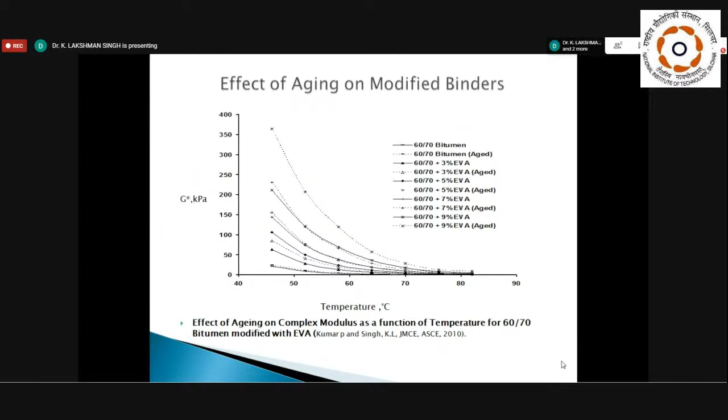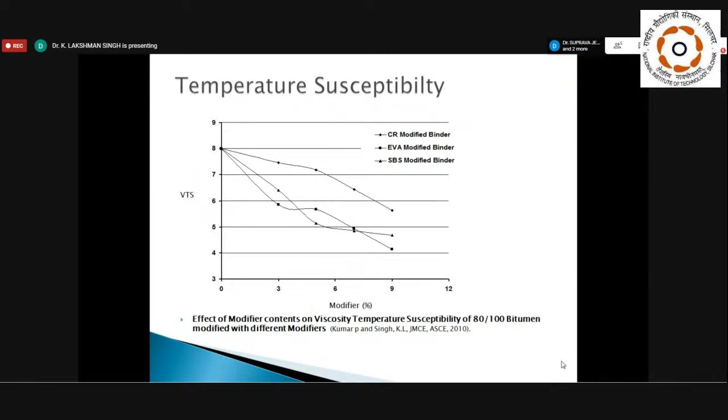Now, I would like to conclude from the above studies that the physical properties of bitumen, such as penetration, softening point, and elastic recovery, are improved with addition of the polymer or rubber. SBS modified binder gives higher softening point and better elastic recovery than EVA and CR modified binder. Higher value of elastic recovery indicates flexibility of the binder and will increase the life of the pavement at lower temperature.

The penetration index PI also increases with increase in percentage of modifier. The SBS modified binder gives the highest value of PI with the same percentage of modifier as compared to crumb rubber and EVA modified binder.

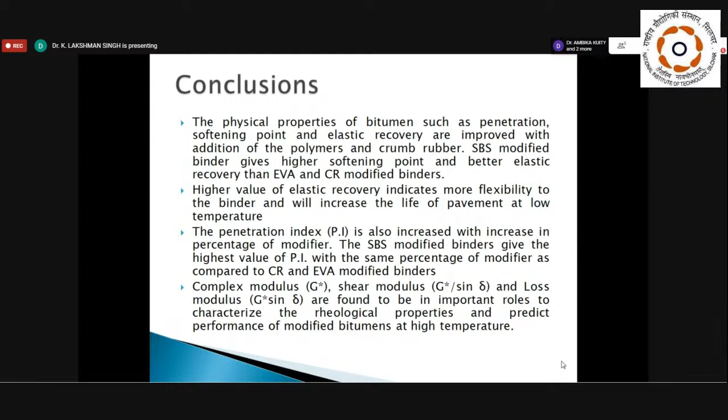So the complex modulus, shear modulus, and loss modulus are found to play important roles to characterize the rheological properties and predict the performance of modified bitumen at high temperature. The complex modulus increases with increase in percentage of modifier and decreases with increase in temperature. However, phase angle decreases with increase in percentage of modifier and increases with increase in temperature.

Phase angle of modified binder also decreases as compared to neat bitumen. The increase in complex modulus and decrease in phase angle of the modified binder indicate higher resistance to deformation as compared to neat bitumen. The temperature susceptibility of the modified binder is lower than neat bitumen, and the increase in percentage of modifier decreases temperature susceptibility. Therefore, the rheological properties of bituminous binder also change by using the aged modified binder.

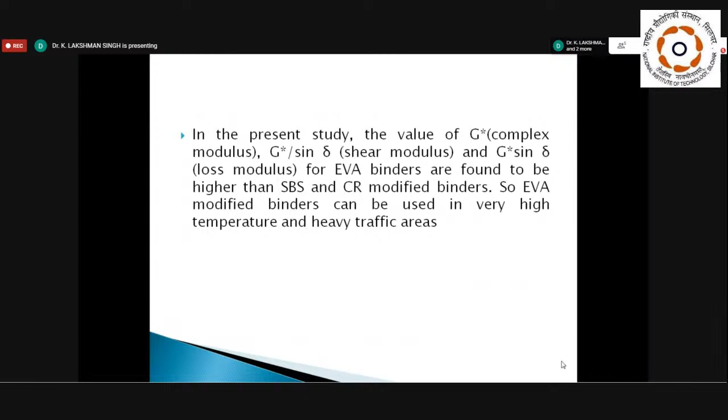From the present study, it is observed that the values of complex modulus, shear modulus, and loss modulus for EVA binder are found to be higher than SBS and crumb rubber modified binder. So EVA modified binder can be used in very high temperature and traffic areas. Okay, thank you.

Thank you very much for giving an insight into the rheological properties of the binder. So now there are lots of questions in the chat box, we can see. Can you answer all these questions right now, sir? No, I cannot see it. Yes, so just pass the question. I will give the question.